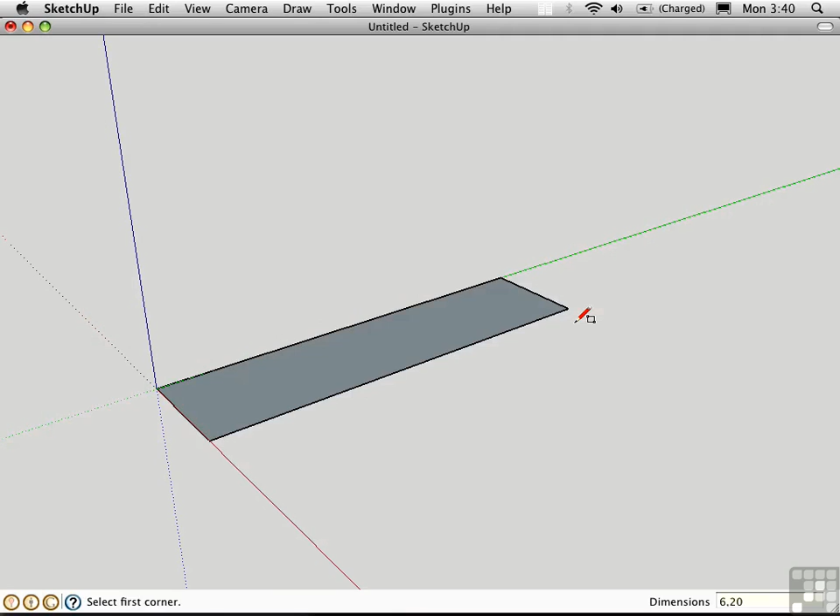To demonstrate this, let's draw a wall. Just make a rectangle and give it the dimensions 6 inches by 20 feet. Push-pull it up to a height of 8 feet, and press T for the tape measure.

By default, the tape measure has a plus symbol near the cursor that indicates that you will be creating guides. If you press Option, that mode is toggled off, and the tape measure is merely used to measure distances.

When it's in guide mode, click on the lower edge of the wall, and you'll see a guide immediately come off of that edge, parallel to it. Click somewhere above that and type in 3 feet to offset a guide exactly 3 feet from the ground.

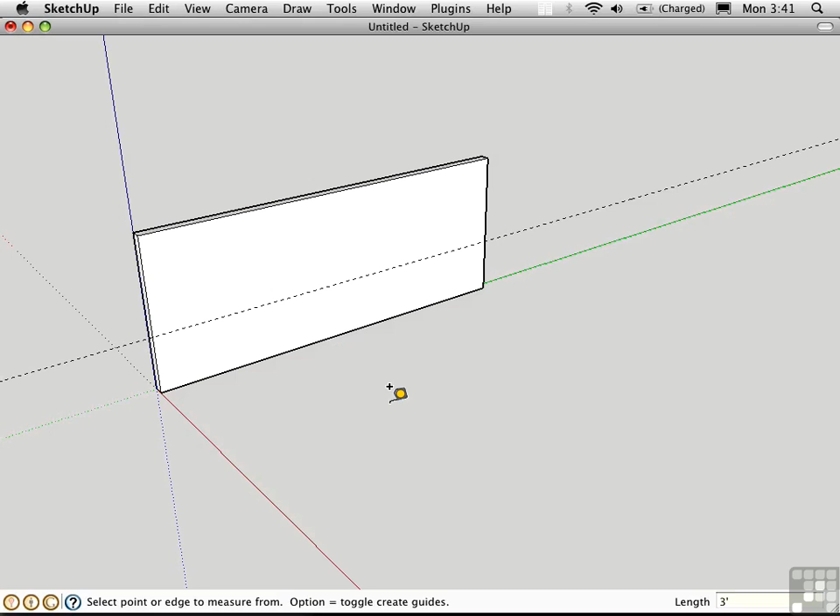Draw a rectangle here representing the window. Notice that the golden section is a possibility here on a rectangle. In this case, I'll push-pull this through to the other side to make an opening.

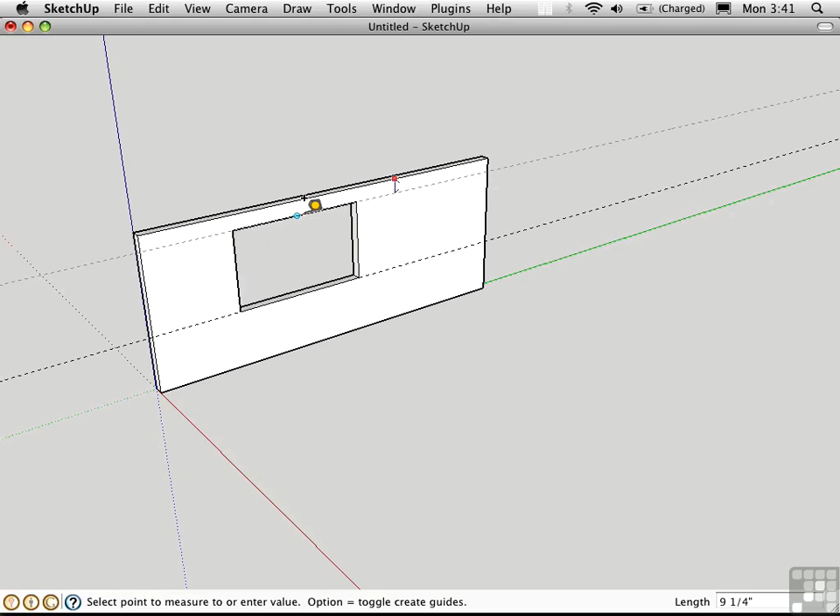Then I'll press T to activate the tape measure and click on the top edge, pulling down a guide from there. I'll click on the top of the window to set the header line. Then I can draw a rectangle representing a door, and I'll push-pull that through as well.

I'll draw a rectangle over here at some arbitrary location and push-pull it up. Let's say I want to draw a line midway between these two positions.

There's a Ruby script called midpoint which does this, and I already have it loaded. I'll right-click on any surface and choose Get Midpoint. Down here it says Select First End. I'll click here, and then I'll click on the second end. It puts in what we call a construction point right here, which is a form of a guide.

The tape measure can also be used to create construction points, and this works by clicking 2 points along a single edge. The second point you click creates a construction point.

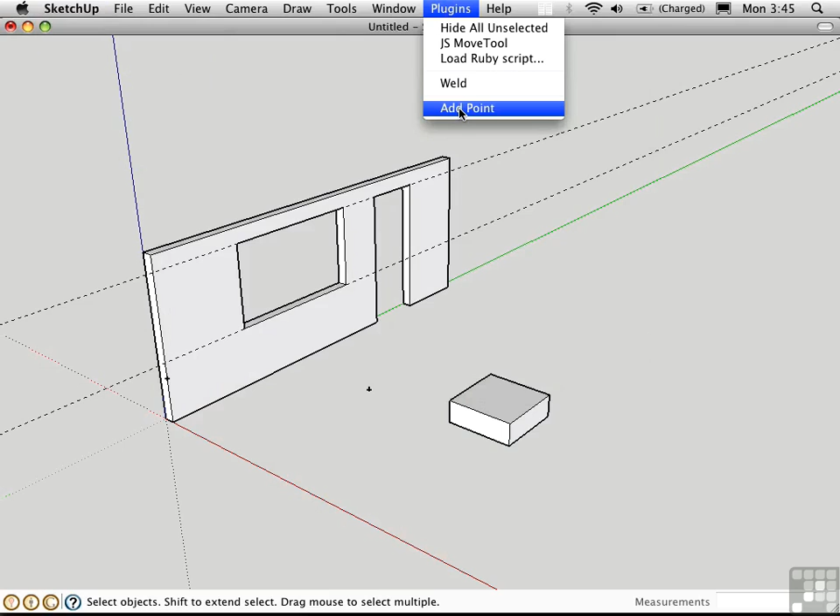There's a Ruby script called Add Point, which does what it says. It's by TIG. I'll go ahead and choose Add Point from the Plugins menu. Unfortunately, you can't add points in free space. Instead, you can add points on existing faces or along existing edges. Incidentally, if you hold down the Shift key on an edge, you break the edge at that point.

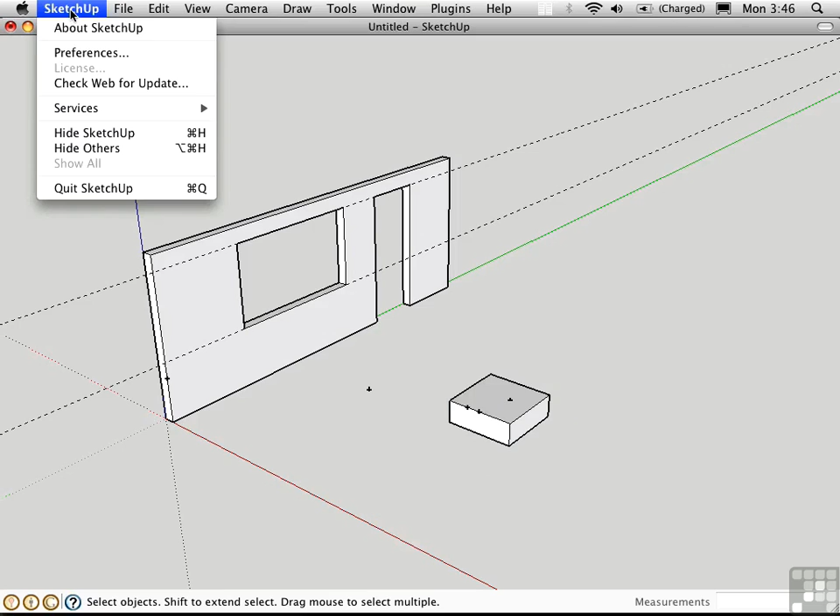Jim Foltz has written a useful guide type script called Construction Line Tool, which I'll just load now. And this is actually on the Draw menu. It works very much like the Line Tool.

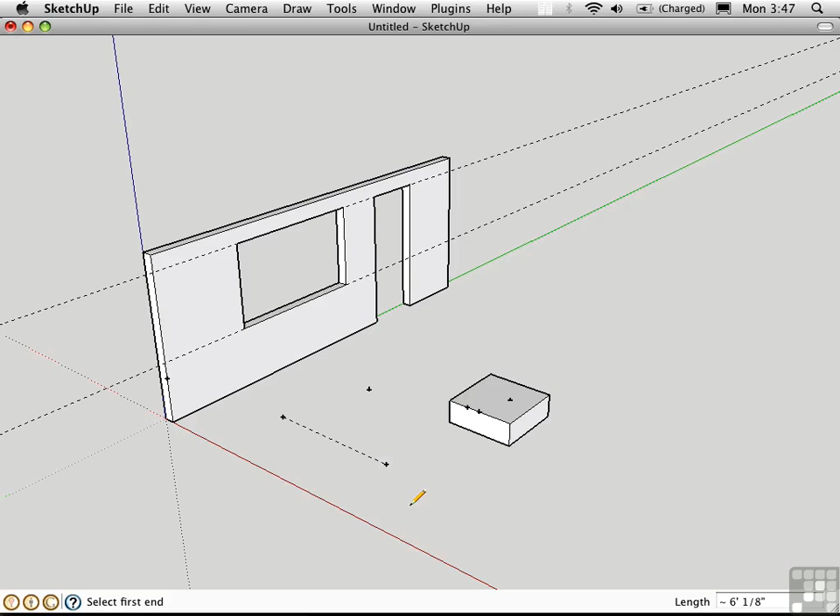You can see that the cursor gives you a yellow pencil instead of the standard red one. The difference here is that I'm able to draw guide lines, and they're terminated by construction points. The difference between guide lines and regular lines is that guides can't make faces, even when they're closed. They're merely used to snap things to when you're drawing.

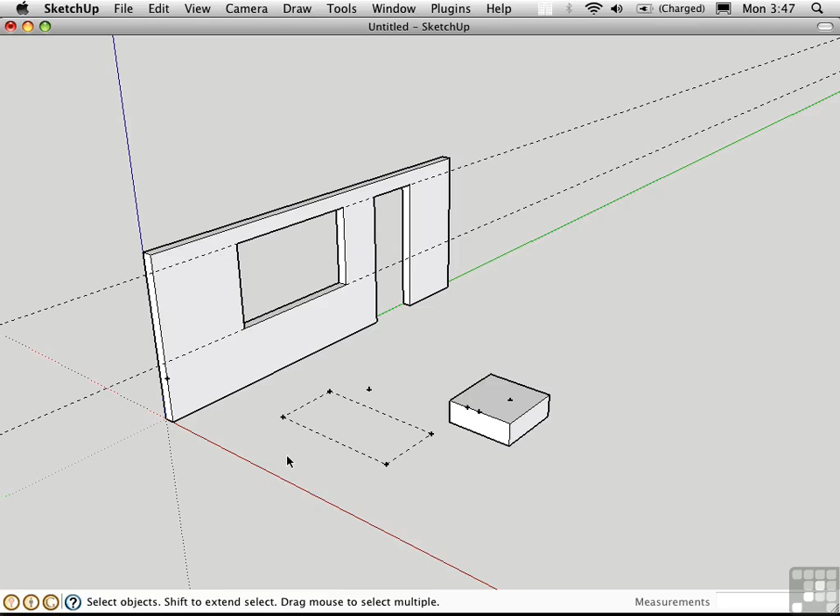When you want guides that aren't parallel to existing edges, you can create orthogonal guides and then rotate them, or you can use the special purpose protractor tool by pressing Option P if you're using my shortcuts. This looks just like the rotate tool, and it functions just the same.

The only difference is that it doesn't actually rotate anything. Instead, it's used to measure angles, kind of like the tape measure measures distances, and it creates guides.

So let's say I wanted to create a roof here on this hypothetical building. I might hover the protractor over this edge, hold down Shift to lock the inference in the green plane, click here to set the center point, click somewhere over here, and then up a distance to create a guide.

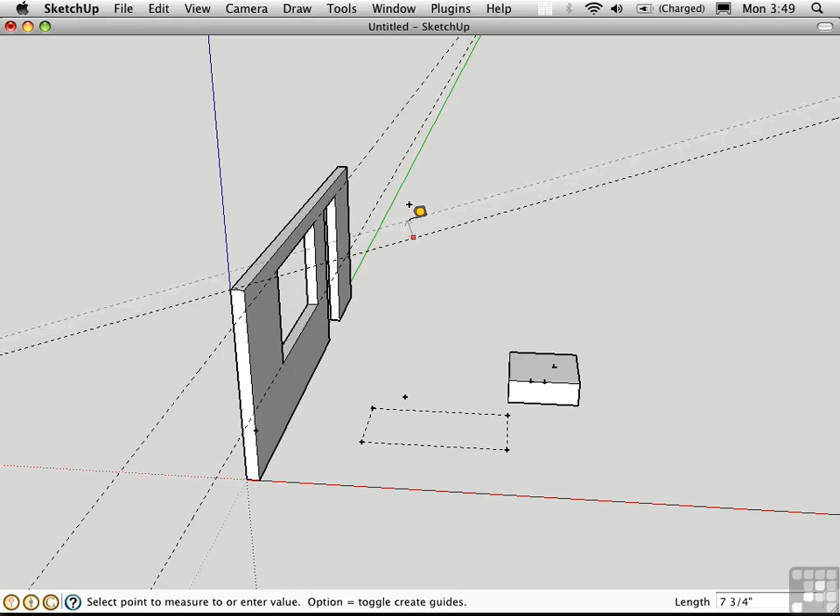Then I'll type in a slope of 4 in 12 by typing 4:12 return. Now I can use the tape measure to offset a guide from this existing guide, and use the line tool to sketch in a roof. I'll push-pull it across.

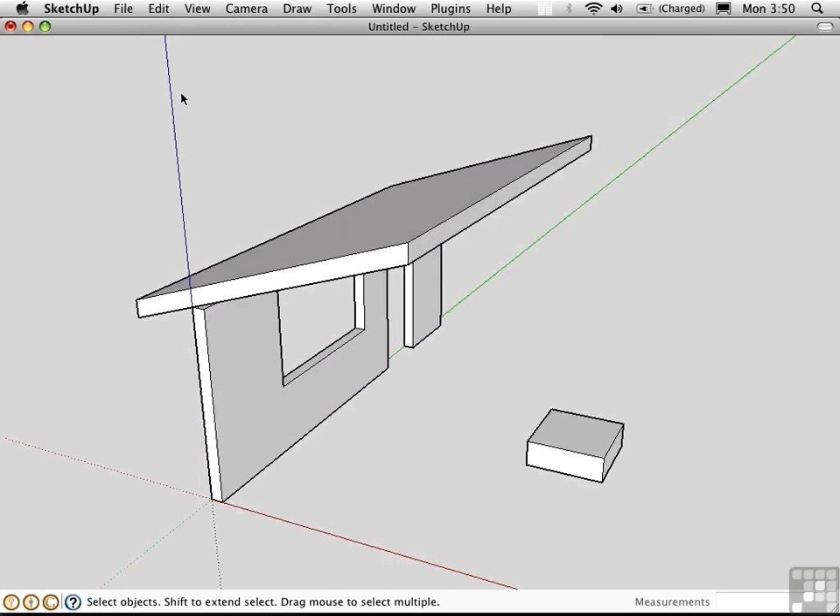When you're done with your guides, you can individually delete them or hide them, or you can globally turn off the view of guides, or alternatively, delete them all by choosing Edit, Delete Guides.